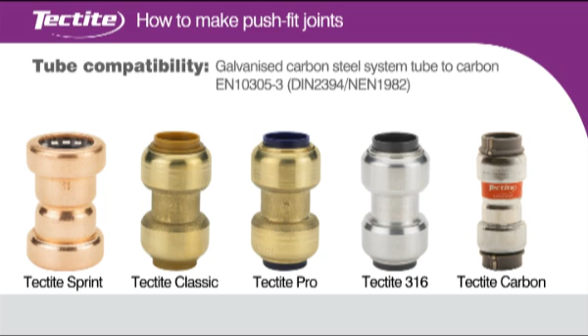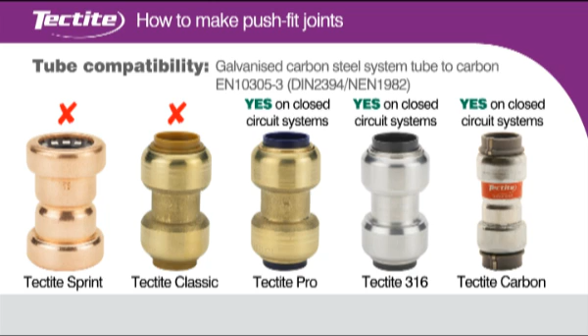Tectite Push Fit Solutions. How to make push fit joints. Tube compatibility. Electrical continuity.

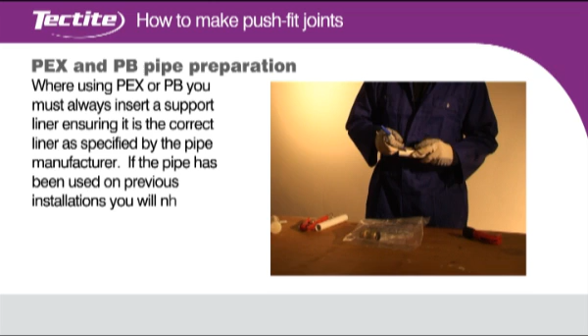PEX and PB pipe preparation. If you're using PEX or PB pipe, cut the pipe square using pipe shears. Where using PEX or PB, you must always insert a support liner, ensuring it's the correct liner as specified by the pipe manufacturer. If the pipe has been used on previous installations, you will need to cut it back behind any teeth or score marks.

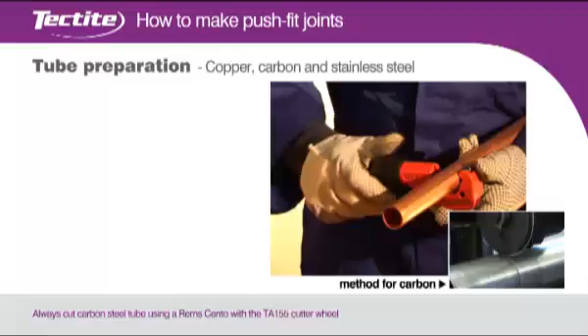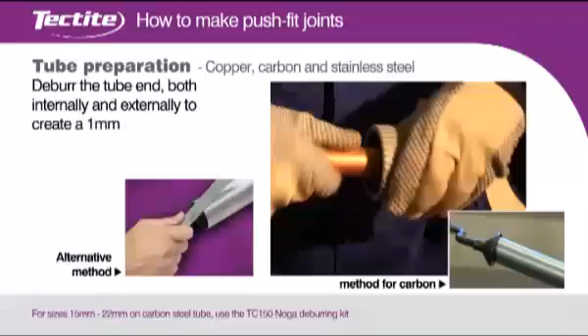Tube preparation for copper, carbon and stainless steel. Always cut the tube square using a rotary tube cutter whenever possible. Deburr the tube ends both externally and internally to create a 1mm chamfer on the outside of the tube.

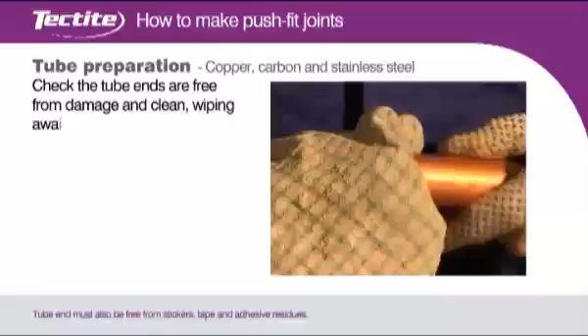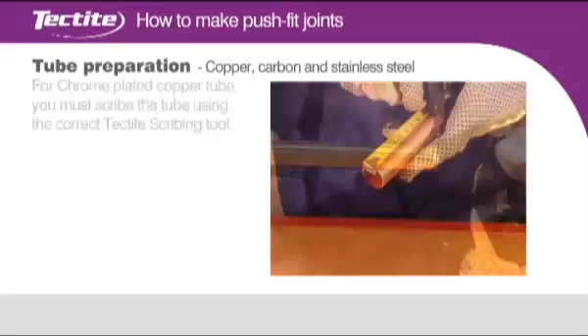Check the tube ends are free from damage and clean, wiping away any swarf to avoid damaging the O-ring on tube insertion. For chrome-plated copper tube, you must scribe the tube using the correct Tectite scribing tool. Mark the socket depth with a marker.

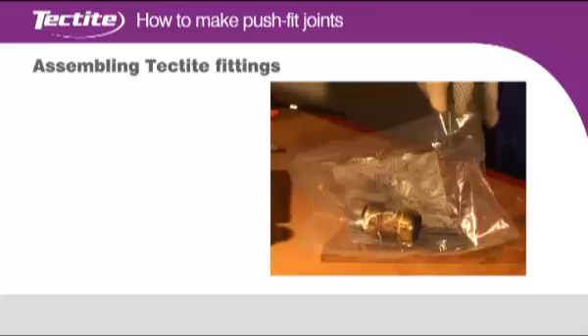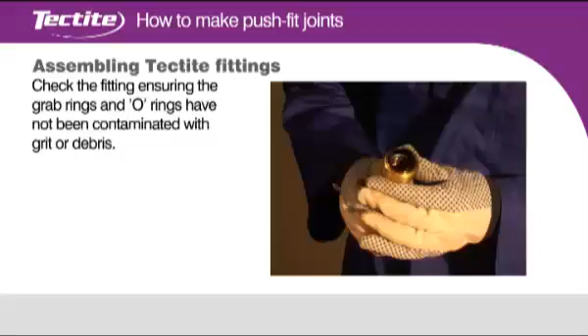Assembling Tectite fittings. The fitting should be kept in its bag until point of use to protect the O-ring. Check the fitting, ensuring the grab rings and O-rings have not been contaminated with grit or debris. Insert the tube or pipe firmly with a slight twisting action until it reaches the tube stop with a positive click. Ensure the depth insertion mark corresponds with the mouth of the fitting, then pull firmly on the tube or pipe to ensure the fitting is secure.

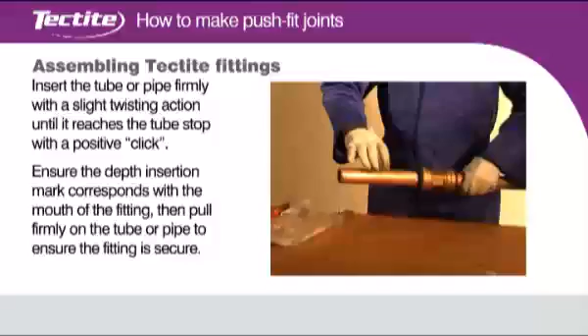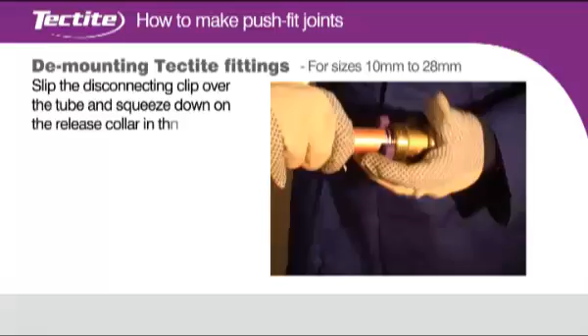Demounting Tectite fittings for sizes 10 to 28mm. Slip the disconnecting clip over the tube and squeeze down on the release collar in the fitting. With the other hand, pull out the tube with a twisting action. Or place the release forks of the disconnecting tool around the neck of the fitting, then squeeze down on the release collar. With the other hand, pull out the tube with a twisting action. Check the fitting and the tube for damage before remaking the joint.

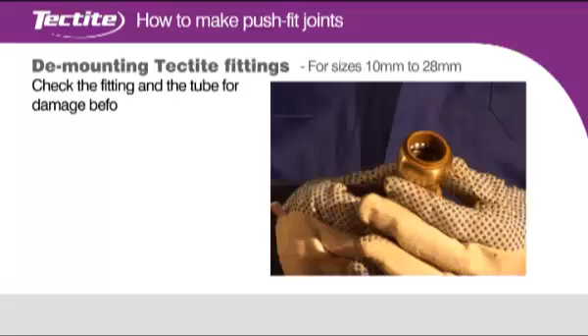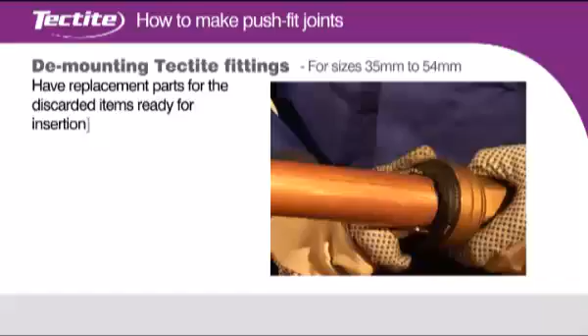Demounting Tectite fittings for sizes 35 to 54mm. Have replacement parts for the discarded items ready for insertion. Using the Tectite DTX end cap tool, insert it into the slots in the end cap. Turn the tool anti-clockwise to unscrew the end cap and slide it along the tube away from the fitting body.

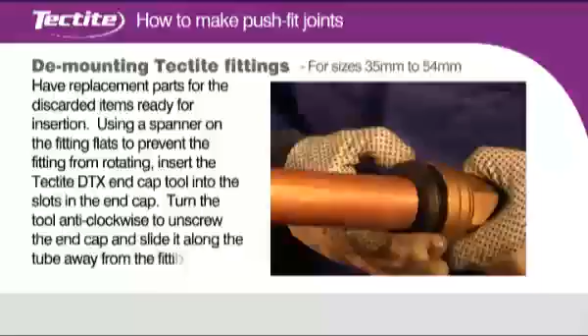Pull the tube out of the fitting body. Remove and discard the O-ring. Remove and retain the alignment ring. Snip off the grab ring with side cutters and discard. Before reassembly, replace the discarded parts. The components must be clean and the O-ring lubricated using S130 silicone lubricant. Replace the components in the correct order as shown and check they are fully seated in the fitting body.

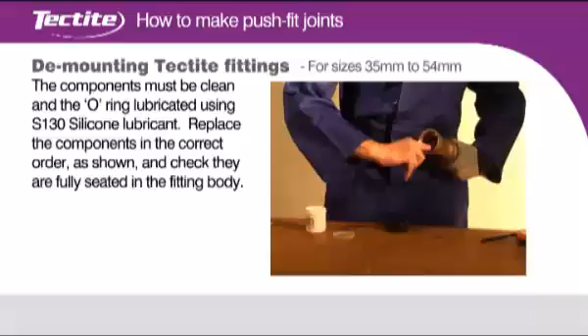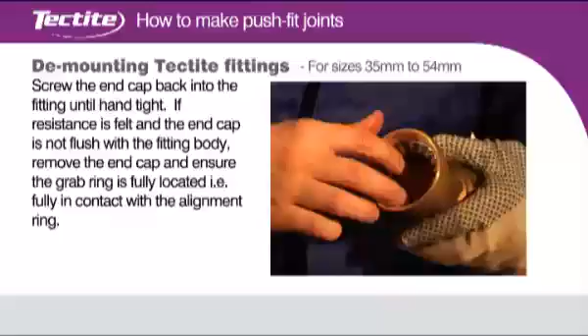Screw the end cap back into the fitting until hand tight. If resistance is felt and the end cap is not flush with the fitting body, remove the end cap and ensure the grab ring is fully located, i.e. fully in contact with the alignment ring. Again, screw the end cap into the fitting until hand tight.

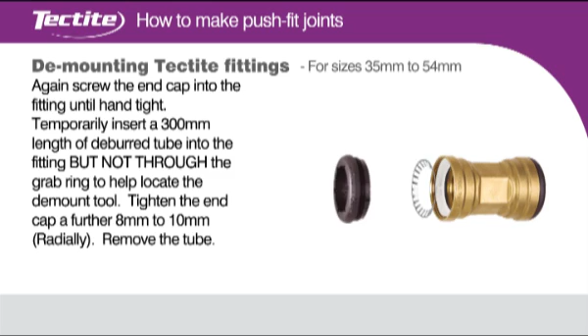Temporarily insert a 300mm length of deburred tube into the fitting, but not through the grab ring, to help locate the demount tool. Tighten the end cap a further 8 to 10mm radially. Remove the tube. Before reinstalling the fitting back into the system, check the end of the tube for damage. If the tube is scored or damaged, remove the affected section with a tube cutter and prepare the tube as described earlier.